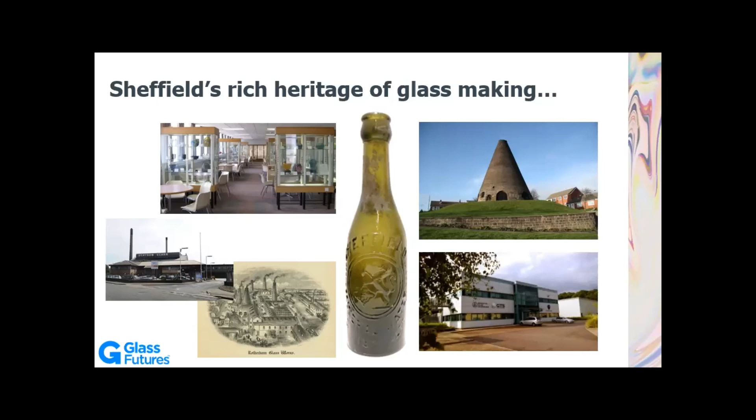So up in Chapeltown, you can see the building there. That is the home to British Glass, the trade association, Glass Technology Services, the GTS technical services and consultancy group, as well as the Society of Glass Technology, which is also based in that building. So Sheffield has a rich heritage, and it's still got a lot of glass research and manufacturing, even in the present. So I thought I'd start by asking a bit of a question, if I can change the slides.

But just to give you the different uses of glass. So obviously most people think of bottles and windows and tableware when you think of applications in which glass is used. But for example, mobile phone screens, they're made of glass, special glass called Gorilla Glass, ultra lightweight, very thin, very strong. I'm sure you've all come across the glass insulation you have in your lofts.

Interesting, that's designed so that if you breathe it in, it dissolves in your lungs. It doesn't give you cancer. So interesting fact there. It's still not good to breathe it in. I wouldn't recommend it, but at least it's not that dangerous if you do. Interesting: lasers. There's a lot of glass in lasers, not just the lenses. The laser medium itself can be made out of glass.

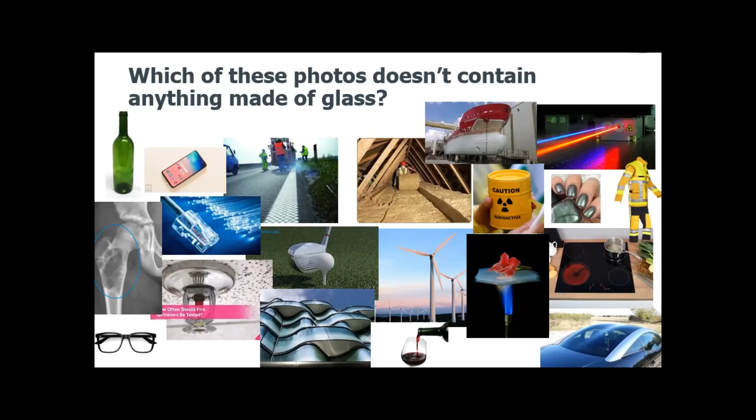And then in road markings, road markings actually put a layer of really tiny glass beads on the surface of the paint, and that's what kind of reflects for those driving along. So it is actually the glass that makes road markings reflective. So you can ask me about the other applications later, but I won't bore you anymore.

So despite the fact that glass is used in a whole host of different applications, the majority of the glass that is made, particularly in the UK, is made primarily for glass containers and for flat glass that's used in applications such as windows and car windscreens. There's a little bit of fiberglass. Some of that's the continuous fiber for fiberglass, but most of the rest of that is for loft insulation and wall insulation as well.

And apparently that's because of the combination of really good coal reserves and lots of the right quality sand. So you can't just use any sand for glass. You have to use quite high quality sand. Apparently, historically, there was lots of that sand available. So interestingly, that's where all the glass is around. So we are really in the capital of glass.

So glass itself is a very energy intensive process. Obviously, you've got to melt the raw materials. So the primary raw materials are sand, limestone, and sodium carbonate. So you have to mix those together with some other additives and hopefully a lot of recycled glass. You have to heat them up to around 1500 to 1600 degrees in the furnace to get them to melt and dissolve together. And then they come out at the end and you can form it into the final products.

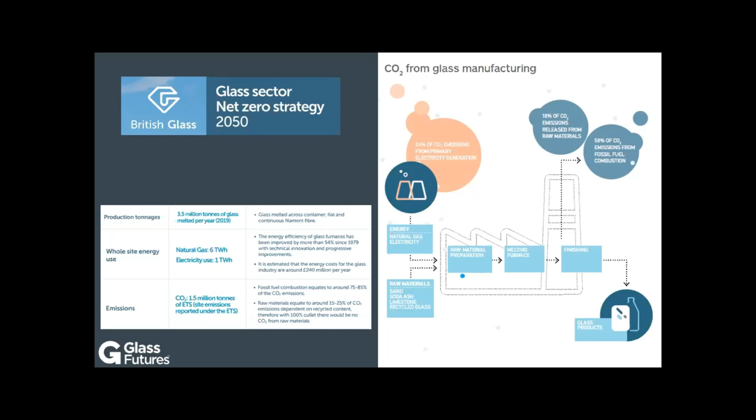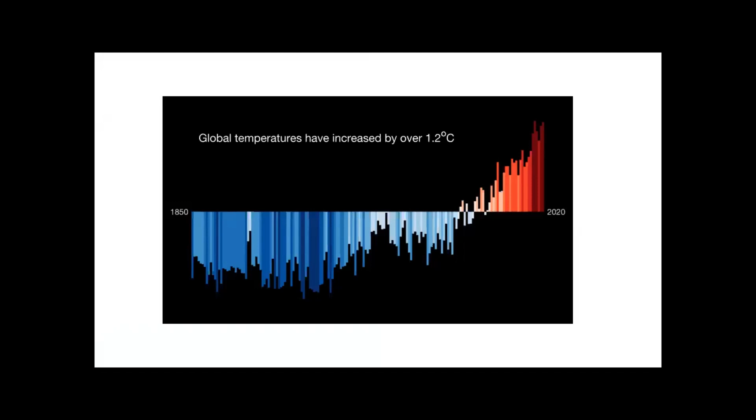And then there's an estimated further 500,000 tons of CO2 that's released in terms of those scope 2 emissions as well. So glass, whilst it has lots of positives for our society, there's also a negative there in terms of the amount of energy and the amount of CO2 that's required. And I'm sure you've all seen graphs like this that show that the average temperature around the world is increasing. So because of this, understandably, the glass industry is under a lot of pressure from its customers and from its supply chain to do everything it can to reduce those greenhouse gas emissions, in particular the CO2.

I think this is kind of the reason why the vision of Glass Futures was born. So if you look at the glass industry, it's a big industry, but it is made up of quite a large number of different players. They're all often doing their own research. If you look at the nature of the glass manufacturing process, most glass sites will have maybe 1 or 2 furnaces. Those furnaces are huge. They'll have an output of anything from between 400 tons of glass per day up to about 900 tons per day per furnace. And those furnaces have to operate continuously for up to 20 years.

So you can understand why a glass manufacturer is a bit reluctant to trial out a new technology on their line, because if they do anything that damages that furnace or puts that furnace out of action for even a few days, then it will cost them a huge amount of money. So there was a real need within the industry to try and work out how do we help the industry, first of all, identify those key technologies that they need to become more sustainable. And then once we've identified them, how do we actually develop them and trial them? And I think that's where Glass Futures was born.

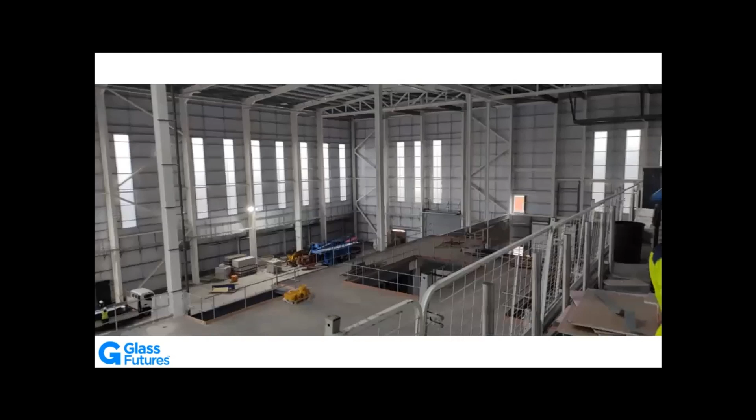So they'll start at the far end where the furnace will be, and then the process will come towards us, looking at this picture here, and then there'll be the forming and then the inspection at the end, and then it'll be taken off here. That's where the furnace is going to go. So this is at the far end of the picture that you were just looking at. There's actually a hole here, which is where the furnace will go, and then this hole here is where we're going to have our container forming sections.

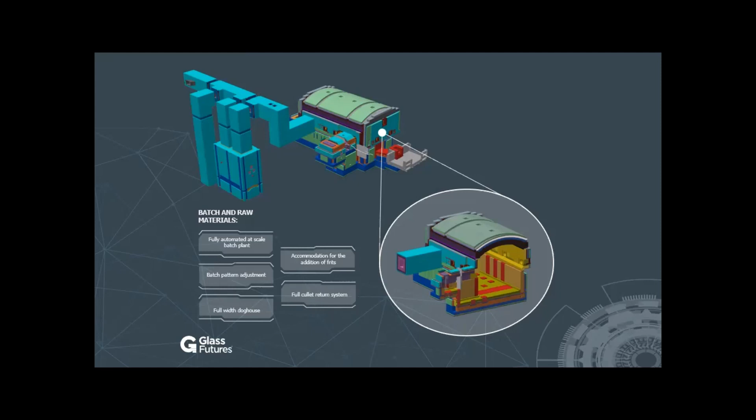I also designed it so that rather than the exhaust just going straight out through the chimney, we can divert it through different pockets, either to assess different refractories or to do things like looking at waste heat recovery technologies or carbon capture. So that's the schematic of what the furnace will look like.

As well as the actual furnace we're building in St Helens, we've also developed another combustion asset. This is actually based at the Brinsworth strip mill, Liberty Brinsworth strip mill site, not too far away, just opposite the Magna Science Park. This is what it looks like. It's quite a big facility.

Basically it's like a scaled down version of the furnace. We don't actually put glass in there, but it's designed to simulate a furnace and the burner technologies that you put into a furnace. It's got some water-cooled pins at the bottom, which you can see as the darker areas in that picture, to draw out the heat to simulate what you would get if you put raw materials through there and glass out of the furnace.

This is really there to try and understand some of these alternative fuels - understand how they combust, how you optimize the flame, how heat is transferred from the flame into the hearth or into your equivalent of the molten material, and what emissions you get as well.

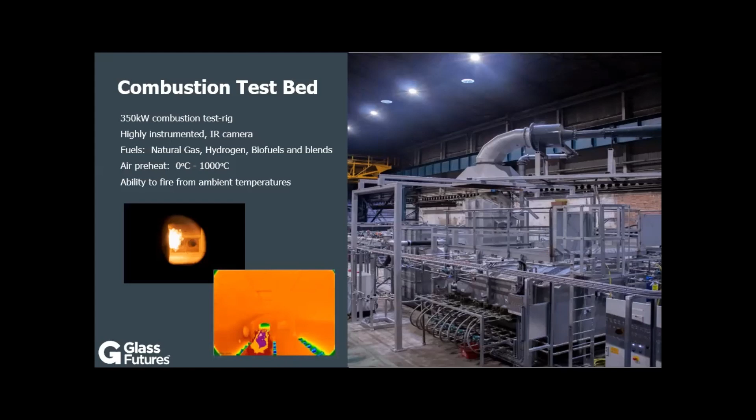The idea is that you can test your burners, optimize them before you actually go onto a furnace, or work out the differences of the fuels and how they perform. So those are the assets, the test equipment we're building. I'm now going to move on to talk about some of the actual research we're doing with these assets.

What we've got here is the key areas where we think that as an industry we need to focus in order to truly make our glass industry sustainable. If we can really address these 6 areas, we'll probably achieve most of the low-hanging fruit in terms of taking out the biggest amount of CO2 emissions and trying to make our raw materials sustainable as well.

I'm sure most of you have probably heard of these - low carbon fuels already looked at, so hydrogen, biofuels, electric are the prime candidates there. We're doing some work on carbon capture, which I'll talk about later. We're doing a bit on raw materials and recycling, looking at new raw material compositions.

And interestingly, we're also doing a lot on what's called Industry 4.0. This is basically a catch-all term for anything related to digital computing technologies - computing technologies that are used to control processes. Because if you look at most manufacturing processes, there's a lot of waste, and often they use a lot more energy than they need to.

One way to avoid something going wrong is to overfire the product, because then you know it's definitely properly melted or properly sintered. But with some of the new process control technologies developed today, you can control your process so you don't need to use as much energy, or so you can spot when a process is going out of line and correct it before it starts making defects. That's something we're doing quite a bit of work on.

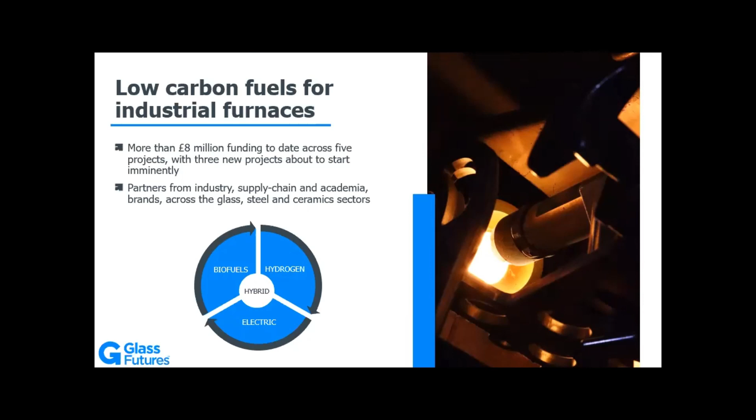However, we realised that there's not really one fuel that's going to satisfy every single furnace. So what we'll probably be looking at is more of a hybrid option longer term as well - how can we use a mix of fuels to get that optimization of heat transfer versus the melting performance and other characteristics you need for your final product.

For those who maybe aren't so familiar with hydrogen and biofuels, I thought I'd give a bit of an overview as to what we mean when we say hydrogen as a fuel. In terms of what hydrogen is, it's literally just hydrogen molecules, or H2 molecules. They are everywhere - where you've got water, where you've got any organic materials, you've got hydrogen. So it's abundant and hopefully it will always be inexhaustible.

It could also be argued it's 100% renewable. You can make it from water, for example - you can split that water into hydrogen and oxygen if you have an electrolyzer. When you combust the hydrogen with the oxygen, it forms water again. So it's totally renewable, with no carbon involved - no CO2 emissions in the actual combustion itself.

Very nice and clean - actually quite good if you're in a remote environment. All you need is water, electricity, and an electrolyzer, so you don't need to be connected to the grid necessarily, and you don't need to be tapped into a natural gas pipeline.

Interestingly, hydrogen as a fuel is quite a good fuel - it's got very high energy content, which means that when you burn it, it gives off quite a lot of heat for what you put in. So it's a viable candidate to be used in industrial processes. Also, hopefully it can be transported via existing natural gas pipelines with relatively minor changes to the actual pipelines.

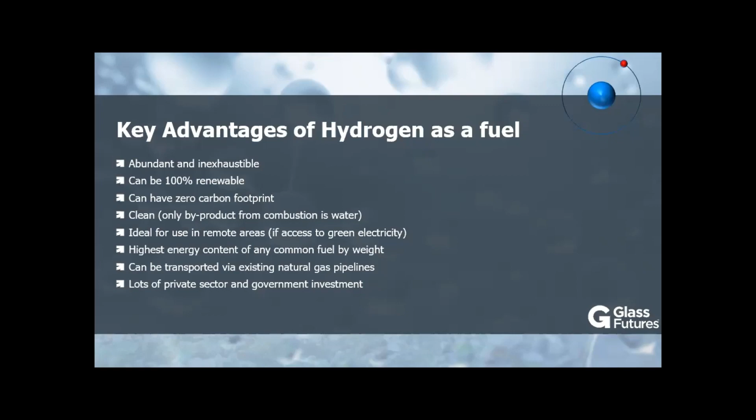And there's lots of government funding in there too, which is good for people like us that want to research it. You might have heard that there are lots of different colours of hydrogen - don't know if you've heard of that. Often on the news, they talk about different colours of hydrogen.

I have to stress that hydrogen itself is colourless - it's not like you get these interesting coloured gases. But really the colour refers to how the hydrogen is made, because depending on how it's made, it says a lot about how sustainable it is as a source of fuel. So the colour is actually quite significant for industry.

Ideally, we want either green or yellow hydrogen, because that's made from a renewable source - basically where you get electricity from a renewable source, you put it through an electrolyzer, which splits the water into hydrogen and oxygen. But you can also get hydrogen through other processes.

The common one at the moment is what they call steam reforming. That's not particularly great because basically you have to heat up some steam, get your natural gas, and then break the natural gas into hydrogen - so it actually produces a lot more CO2 per unit energy than just burning the natural gas itself. But for research purposes, that's where we get a lot of our hydrogen from, just because we have to, since there's not enough green hydrogen out there. But you can also make hydrogen, for example, from electricity produced by nuclear energy.

There's also other techniques people are looking at, like pyrolysis gasification, where you heat up wastes or molecules or even coal, and it breaks the hydrocarbons down into hydrogen and carbon. If you combine some of these with carbon capture, even though you're using natural gas or coal, you can still achieve net zero carbon emissions. So blue hydrogen is a good compromise in the short term while we build lots of electrolyzers.

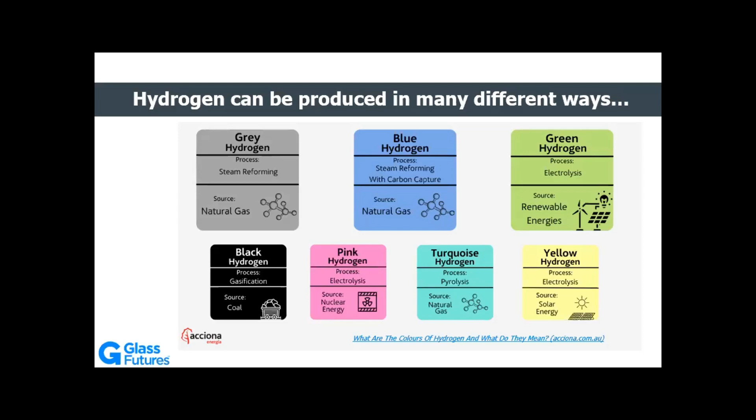So hydrogen is good. I think it has a lot of potential to be a future fuel for the glass industry. However, there are still a lot of challenges we need to overcome to realise it as a fuel in the furnaces, and at the moment one of the biggest is the economics. It's very expensive to make. It's also limited supply, so that's a bit of a challenge. Even for our pilot facility, we're struggling to get enough hydrogen just to run that.

So you can imagine the challenges of running a 900 ton per day glass plant. There's health and safety challenges too. Hydrogen, although it's been used in industry for many years, if a site isn't used to using hydrogen, there are quite a few additional health and safety measures required. Hydrogen is very explosive, so if you're not careful there's a risk you could cause an explosion. That said, it can be managed, and it is managed, so it can be safe. It just requires education of the workforce and new measures to be put in.

There's also other technical issues. For example, when you burn hydrogen you get a much hotter flame, which is quite interesting. Unfortunately that then means you get more thermal NOx. NOx is quite a nasty gas - not only is it a greenhouse gas, but it's also really damaging for the human respiratory system. So you really don't want to produce NOx. Unfortunately hydrogen has a tendency to produce more of it, so that's something we're looking at mitigating. We're confident we can, but it's one of those areas that needs more research.

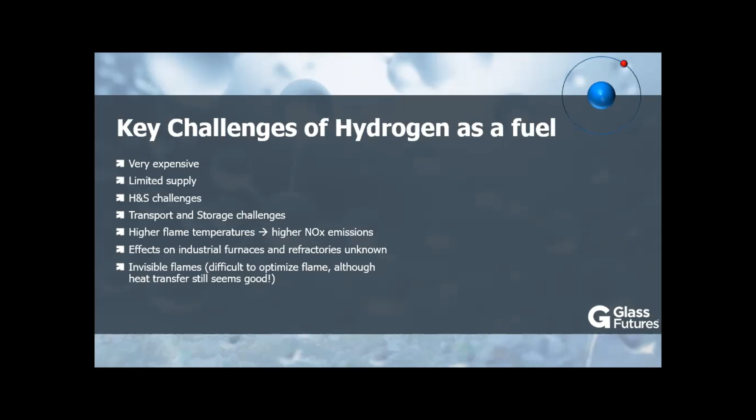Also, as I mentioned earlier, we're not quite sure how it affects the refractories. Hydrogen itself doesn't necessarily affect the refractories directly. The issue is when you combust it, you get a very high moisture content in the furnace atmosphere, which interacts with the refractories but also causes components in the glass itself, like sodium and some of the sulfates, to volatilize. So you get a concoction of moisture-rich sodium hydroxides and sulfates, which many refractories don't like, and current refractories even dissolve quite quickly. So there's lots of work and research still to do.

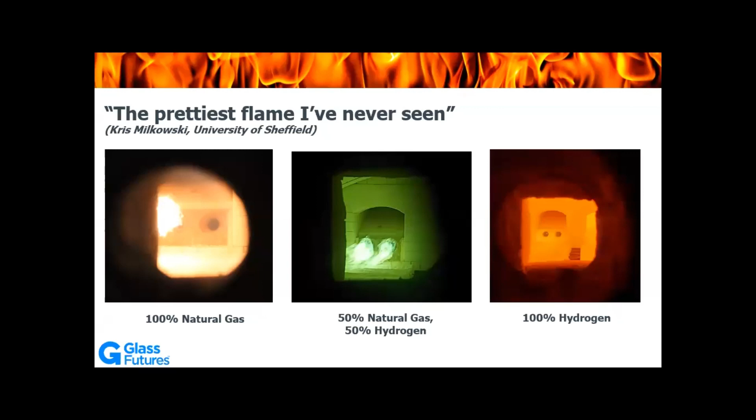Another one is that hydrogen flames are invisible at high temperatures, which was a bit of a surprise to me at first - I kind of thought you'd be able to see it. On the left there you've got a nice luminous natural gas flame that you can see, but as you start adding hydrogen into the natural gas, moving to 100% hydrogen, the flame disappears. So you can see it at cold temperatures, but in a glass furnace you can't actually see it, which is a bit concerning because you can't see where the flame is. Sometimes the flame might change direction or even impinge on the refractories, which is not good. So that's something we're looking at trying to mitigate.

So that's hydrogen. Biofuels is another area we're looking at. I think biofuels also has a big part to play in decarbonising our industries. In terms of what biofuels are, basically it's anything that comes from a bio-derived source - plants, algae, animals, or even waste streams. So anything that grows in some way can be used to make a biofuel. Common feedstocks include things like woods, oils, waste oils like cooking oil, vegetable oils, used quite a bit, and agricultural residues like wheat straw or clippings from trees. There's also now a growing number of crops grown specifically for this, things like miscanthus and willow that grow really quickly on quite low quality soil. There are a lot of companies looking at growing those and converting them into different fuels that can be used in industry or power plants. So biofuels are really good.

They're renewable because obviously you grow them, you cut them down, burn them, then the next plants that come up absorb the CO2 as they grow. They're also good in remote areas. So there's particular interest in biofuels for industry in places like India or Africa, where they don't have great electricity supplies. They're unlikely to get hydrogen anytime soon. So biofuels actually provide a route to start decarbonising those industries in those countries in quite a short time frame.

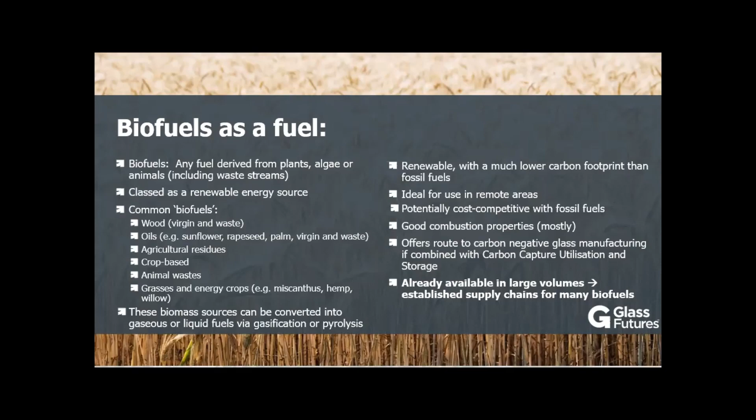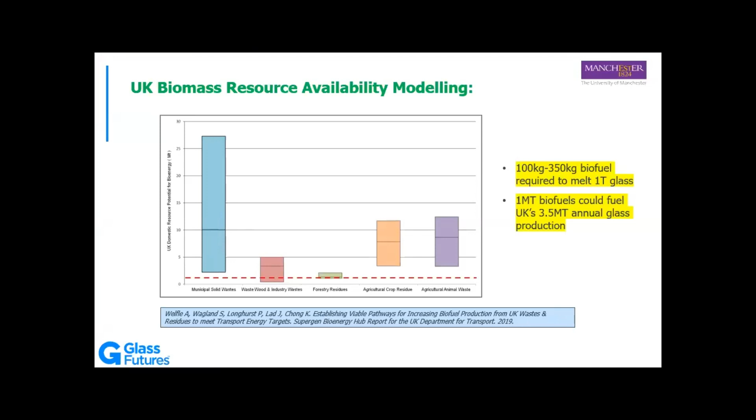The other good thing about biomaterials is that the feedstocks are there in large quantities. This little dotted red line you can see at the bottom is what we estimate to be the annual energy needs of the entire UK glass industry. And these bars show how much biomass is available. So you can see that there's loads of biomass there. The challenge is how you actually convert it into a fuel that can be used in the glass industry. Again, we're working with various groups and university groups to try and work out how we do that.

So whilst biofuels are good, they've got a lot of potential. Again, as with hydrogen, there are plenty of challenges that we need to overcome. There's a lot of technical challenges. Often biofuels might not be very clean, so some of the stuff that you get when you burn them can do nasty things to your refractories or potentially your glass. There's also a lot that needs to be done on the economics. At the moment, the supply chains aren't particularly well established, certainly for some of the lower grade, lower cost fuels. So we need to work on how we can make those more sustainable, or how we can maybe get them in a rawer form.

Because one of the great things about a glass furnace is, because it's at such a high temperature, anything you put in there will combust. So you don't need to refine it to a nice high quality diesel-like product as you would if you're going to put it in a vehicle; you can actually slap in stuff that's pretty crude. But whilst that's lower cost, you get issues such as variability in quality, which the furnace then has to manage.

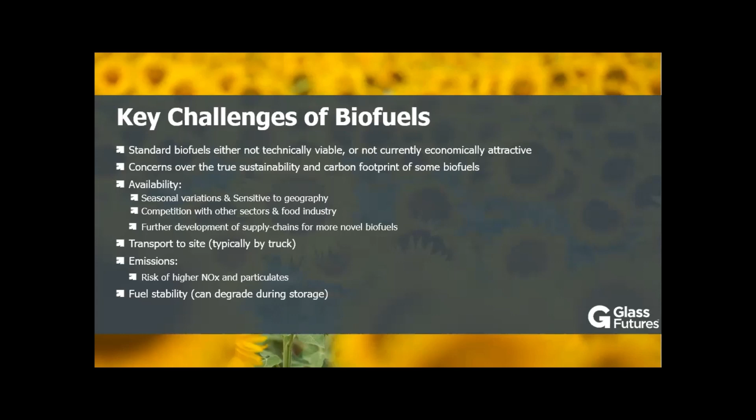And then we also need to look at things like emissions and fuel stability. Many biofuels are not as stable as fuels like diesel. They can be attacked by microbes. If they get too hot, they can gel or break apart. So again, that's stuff that we need to look at. Not insurmountable, but these are challenges that the likes of Glass Futures need to look into.

One good thing about these fuels is they do burn really well. This picture here is some data from our combustion test bed that I showed you earlier. The green bars are the natural gas and diesel, so they were our benchmarks. You can see that even for a 20% hydrogen blend, we've still got quite good heat transfer onto that hearth at the bottom. And some of the biofuels burnt really well. We've got even better heat transfer than for the diesel.

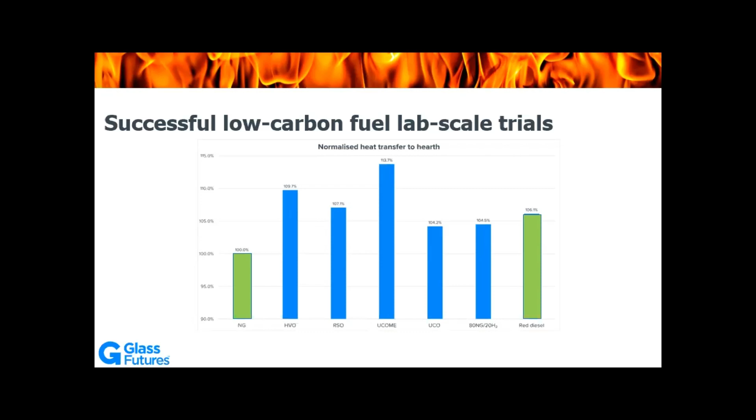So it shows that these fuels are viable. If you burn them in our glass furnaces, we're going to get good heat transfer. We're not going to get problems in terms of getting enough energy into the furnace. So they really do have the potential. If we can overcome those barriers, then I think these are a route to decarbonise our glass industry.

Interestingly, we have done a few trials. These were with higher grade biofuels, so ones that aren't really economically viable because they're quite a lot more expensive per unit energy than natural gas. But we have actually run trials on the container plant. This was one container plant in Northern Ireland, in Derrylin. We ran it for 3 weeks and produced over 4 million bottles. So I actually have some evidence here, just if no one believes me. You can have a look at these afterwards.

No drinking the whiskey, please.

But yeah, see if you can spot the difference between that and a normal bottle.

And the whole point is that you can't, because actually the glass that was produced met the quality standards for their glass manufacturing. So whilst the bottles look the same, the bottle here that I'm holding up, sorry for those at home, you probably can't see them, but you can see an example of it on the slide there. They've actually got, I think it was 95% less CO2 in the manufacture of those bottles than with a standard bottle. So it shows it is possible.

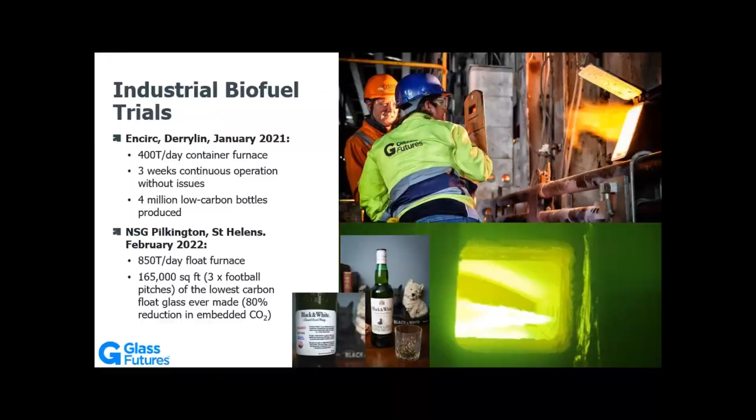And then we also did one on the Pilkington float glass line in St Helens, where they ran that for, I think it was about 4 days, and produced enough glass to cover 3 football pitches. Again, that was some of the lowest carbon flat glass that's ever been produced as well. So it is possible. We just need to understand how to do it better and more economically.

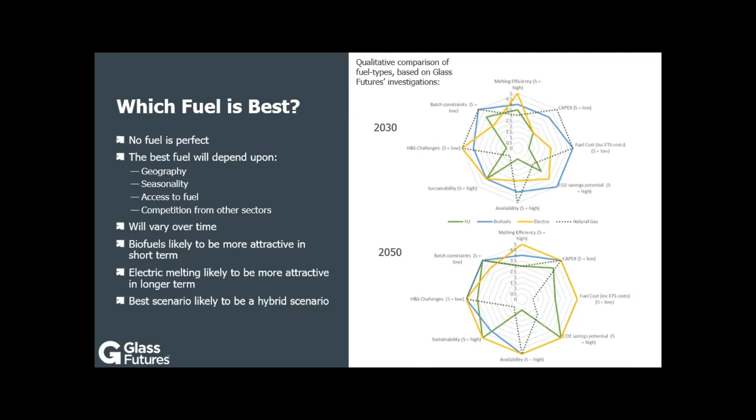Because if you look at a glass plant, if you're building your furnace and it's got to last 20 years, you don't just want to look at 2030, because if some of the other fuels might actually be a lot better and a lot cheaper in 20 years time, you have to think, right, what furnace do I want to design? Perhaps I do need to design it so it can take or be upgraded to use hydrogen as well. So this is all the sort of questions that Glass Futures is looking at to try and help the industry make those valid choices, not just looking at the technical feasibility, but looking at what's economically feasible as well.

A bit on carbon capture. For anyone that's not so familiar with carbon capture, it's a relatively straightforward concept. You basically get your emissions, your exhaust coming out of your furnace, and you put it through a process that strips the carbon dioxide out of the emissions and then segregates that carbon and captures it. And then you can use it to do something. There are various people looking at everything from putting it into greenhouses to help plants grow better, through to using it to create aircraft fuels. In fact the University of Sheffield at their site on the Advanced Manufacturing Park are looking at turning carbon dioxide into sustainable aviation fuels, which is really interesting.

But within Glass Futures, our main remit is to understand what technologies can be used within the glass industry. One of the challenges we've got within the glass industry and many other heavy industries is that the emissions aren't just air and carbon dioxide. They've got all sorts of other interesting components in there, things like heavy metals, sulfates, NOx emissions that I talked about earlier as well. And those can damage the carbon capture unit. So there's a lot of work going on to try and develop technologies that can survive those kinds of emissions and capture the carbon dioxide as cheaply as possible. So we've done a few studies there.

We think that there are technologies out there that can capture carbon emissions from the glass industry, but it's probably going to be another 5 to 10 years before those are ready, particularly before they're ready at a scale where it's affordable, because at the moment the technologies use an awful lot of energy, which obviously adds to the cost, and also the CO2 if it's not green electricity.

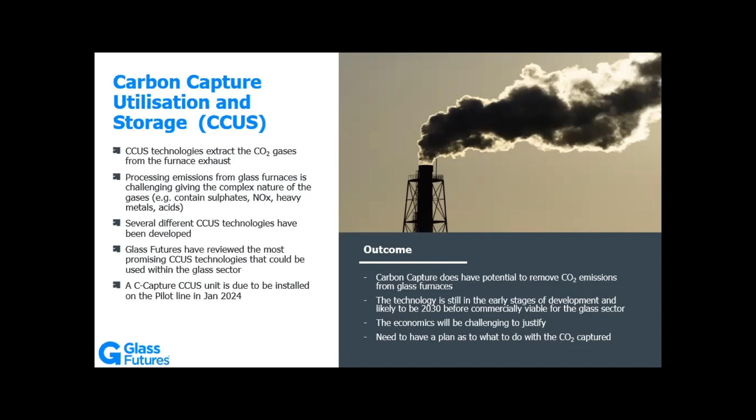But interestingly, we have found a company, C-Capture. They're based up in Leeds. We do actually want to put a trial unit on our pilot line. So hopefully this time next year, we will actually have a carbon capture unit on our line. So we can then start to really understand how glass industry emissions impact those technologies.

I also look at other projects to improve the sustainability of the glass industry. So it's not just the fuels. You actually have to look at the whole remit of the glass manufacturing process in order to get a truly sustainable industry. So we are looking at, as I mentioned earlier, things like digital technologies, and new raw materials. So feel free to have a look at them later.

But for example, this little black glassy blob actually came out of a biomass electricity plant. So it was a clinker that was formed in the burning, I think it was of wheat straw. This was when I was at GTS, so it's the GTS and Sheffield Hallam teams that did the work. But we took this material and incorporated it into a glass and actually got quite a nice clear glass. So feel free to have a look at that afterwards.

That's just one example where we've taken a waste that would have just gone to landfill, and we've turned it into a raw material that replaces some of those carbonates that are used in glass making. So if we take a step back and look at all the different opportunities across industries, we can find some really novel solutions of reducing waste and saving emissions in another sector at the same time.

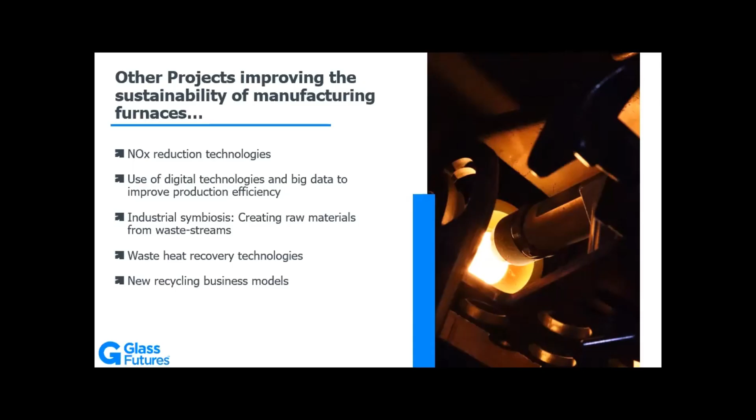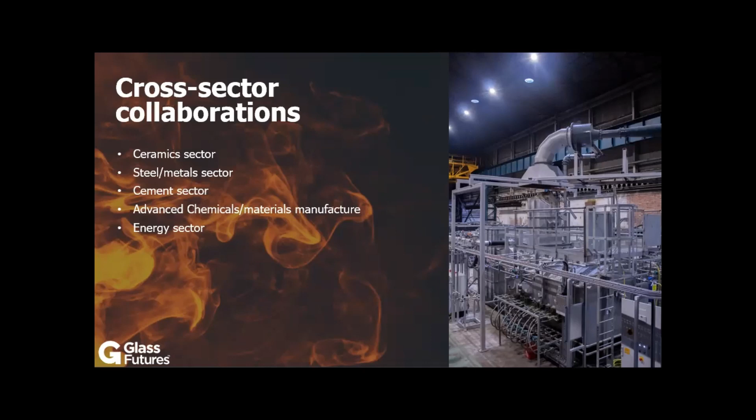So in terms of those cross-sector bits of work, whilst we're Glass Futures, we've actually been given a remit by the government as part of our funding to make sure we're sharing that knowledge across other sectors as well. So we have done a lot of work with the ceramic and steel sectors, and we've also got links into the cement and energy sectors. And we've also got a project with some advanced chemicals looking at using waste heat to drive some of their processes in terms of manufacturing their components.

And subsequent analysis of the 2 sets of products showed that they had exactly the same performance. So firing these products on 100% hydrogen didn't affect any of the product properties. And off the back of that, hopefully in the next year or so, we're going to continue this work to do some industrial scale trials, and we're going to put hydrogen into some industrial scale kilns. So watch this space.

And we also did the same for the steel sector. This was part of a project called HYDESS, based in Sheffield, led by E.ON. I'm sure you've all seen the big power plant with the orange roof near Meadowhall. They're investigating the feasibility of installing hydrogen electrolyzers on their site, and they wanted to work out which of the industrial users in that area could actually use the hydrogen.

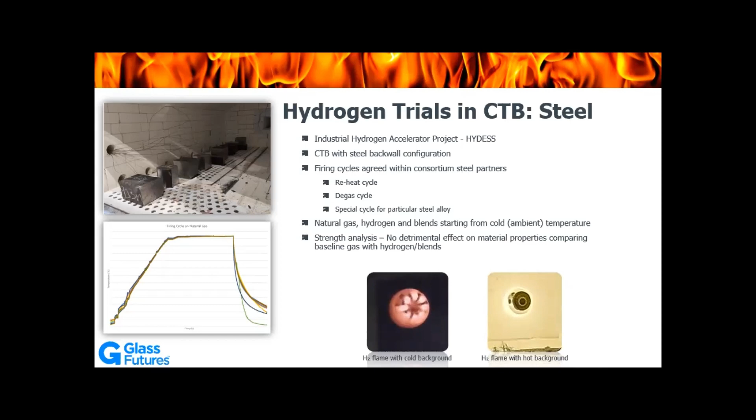So that's the hydrogen burner at cold temperatures. So you can see the flame just about, but at high temperatures, you can't see it.

So you've got Glass Futures, you've got the Centre for Process Innovation, which does a lot of work with the chemical sector. You've got Materials Processing Institute that focuses predominantly on steel and metal sectors, and Lucideon for the ceramics and refractories. And then they're kind of joined together by the Henry Royce Institute. Again, there's a collection of the leading universities that are doing industrial research in the UK.

So the idea is the 5 groups are going to work together to really try and develop some step changes in these, but also to develop pilot facilities or research at scale, that can do research at scale across each sector. So that brings us to the end of the presentation. Just a few closing remarks.

So I think, and I hope you would agree with me after this presentation, that we can achieve a sustainable net zero industry within the UK. It is possible. The solutions are there. However, it's going to require a lot of work. There's still a lot of research that needs to be done. And it's going to require a real buy-in and commitment, not just across the supply chain.